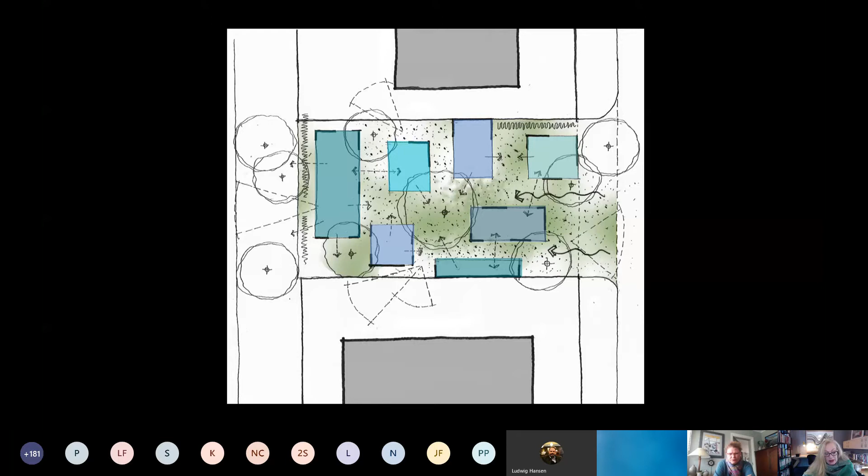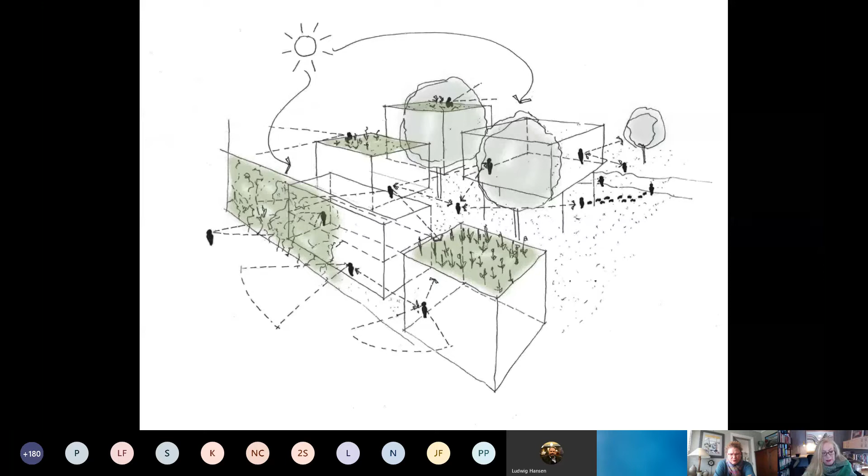The volumes have been linked through landscape, a connection to nature enhancing people's sense of well-being. The landscape also ensures that each person has direct natural light, ventilation, and access to views.

The form and scale of the building responds to its neighbours and the surrounding environs. The site is located in the formerly residential suburb of Rosebank, positioned between two major busy arterial routes and midway between Johannesburg's old city centre and the Sandton business node.

Access to the site is off Keys Avenue, home to a number of art galleries and urban artworks. It has been reinvented as the Keys Art Mile. Rosebank itself is developing into an inclusive, walkable urban centre with a distinct character.

Unlike the high walls and electric fences that often greet visitors in security-conscious Johannesburg, Law on Keys is public-facing and accessed on foot from the street.

The public areas of reception, dining, and meeting, as well as the semi-public open-plan office space, all open onto the central and northern courtyards.

Visitors pass a sculpted garden with artworks, connecting this building conceptually to the Keys Art Mile. The reception and waiting areas are connected to the central planted courtyard, a pivotal feature in navigating the building.

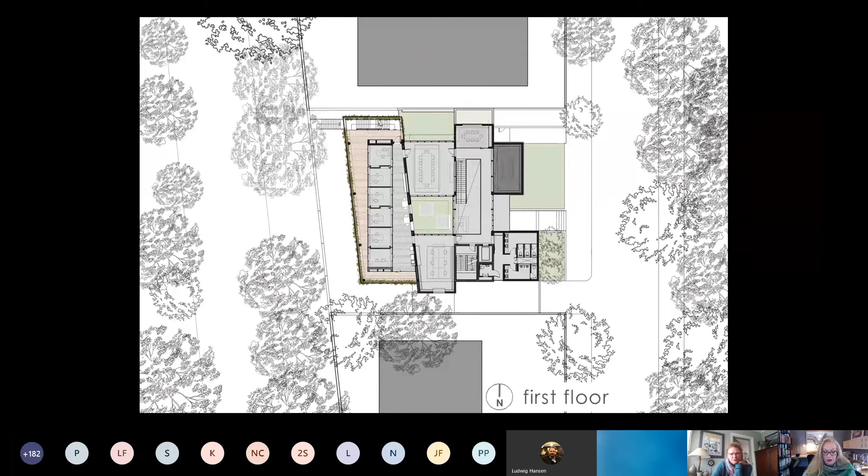The library, meeting room and boardroom at first floor level are visible from the double volume reception area below. The boardroom is accessed from the public area, but also has a private door for the legal team.

As on the ground floor, the individual offices are glass boxes opening onto a private balcony and contained within a planted green screen. Each floor has its own kitchenette and associated social space, opening directly onto a balcony.

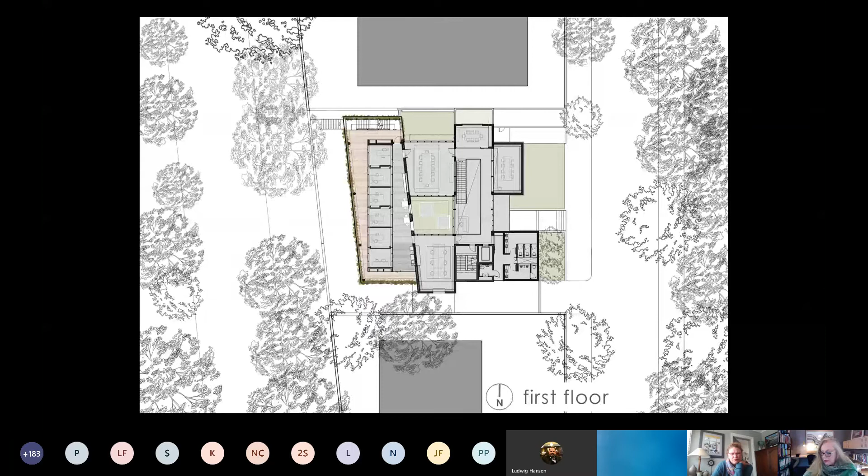Materials used for the private external balcony areas are the same internally, the private spaces seeming to float within a garden, connecting and blurring lines between inside and out.

There are no passages, instead pause spaces and comfortable waiting areas, all with far and near views of nature. The library, boardroom and meeting room are formal, quiet and unfussy, with rich detailing and materials.

The artworks and bespoke interiors, all by local South African artists and craftspeople, have been commissioned and curated specifically to suit each area.

Outdoor terraces are designed as garden rooms for entertainment, relaxation and social events, surrounded by planted roofs that offer relief and softness. Entered past the PA's office and waiting area, the senior partner's private suite opens onto a covered deck surrounded by a planted screen and planted roof terrace.

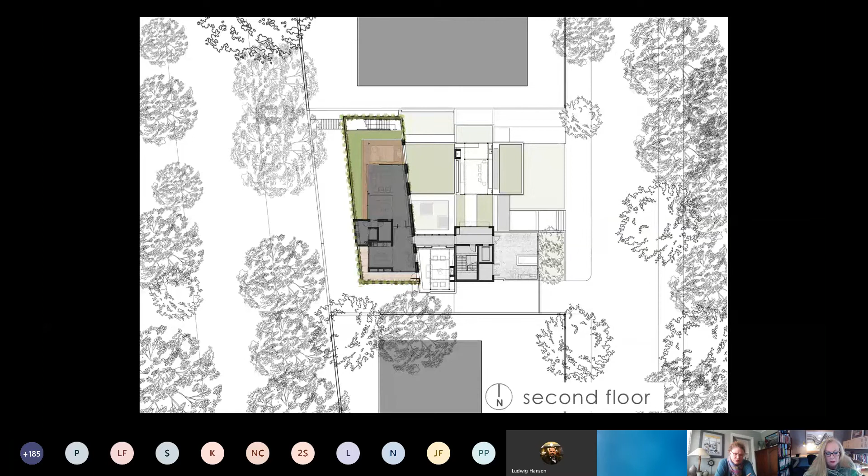The outdoor rooms, whether a typically South African barbecue area or an outdoor lounge with fireplace for winter, facilitate alternative meeting areas without adding to the bulk.

The waiting area, PA's office, and partner's suite is not only a private office, but also a meeting place for highly confidential and complex negotiations.

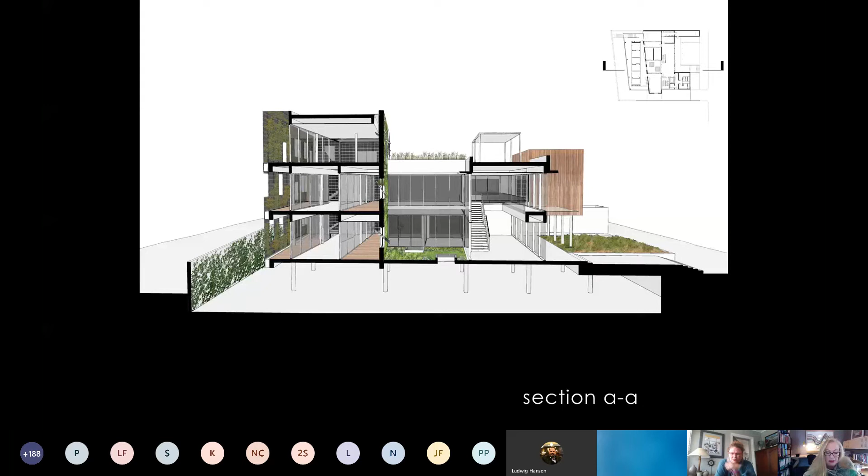This section shows how the building is integrated with the neighborhood street and simultaneously has a presence on the main arterial. Spaces are one room deep, allowing for sun penetration and natural lighting to all spaces.

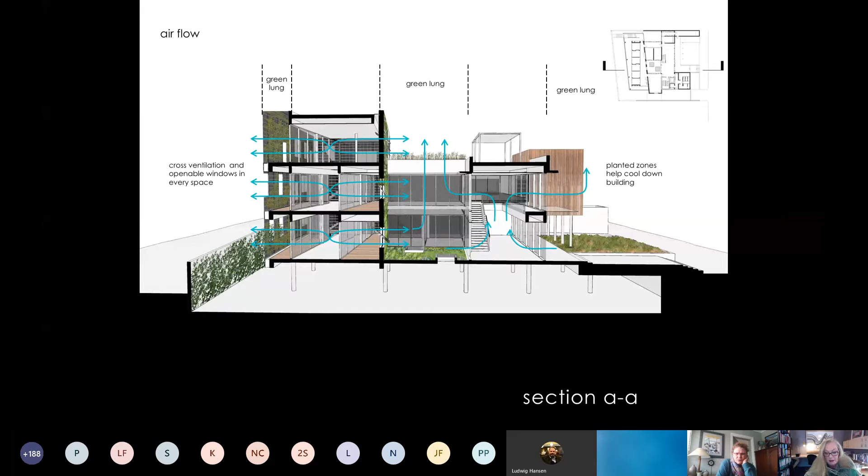Invisible to users or neighbors, photovoltaic panels on the rooftop provide 65% of the overall power requirements. Doors and windows open into the green lungs, facilitating natural and cross ventilation.

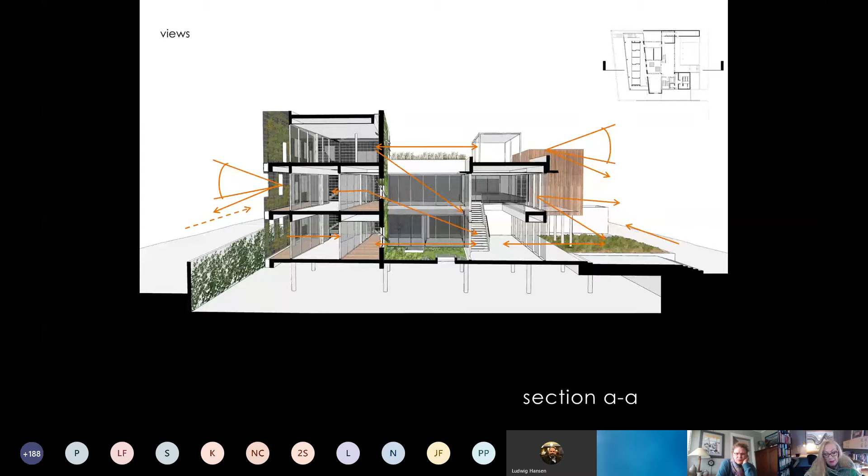Near views enable communication and visually connect colleagues. Far views connecting people with their contexts in the city beyond.

From a dry Highveld mining town, Johannesburg has been planted into a large man-made forest by its inhabitants. In reference to this man-made forest phenomenon, the idea of fabricating landscapes has been developed as a key concept.

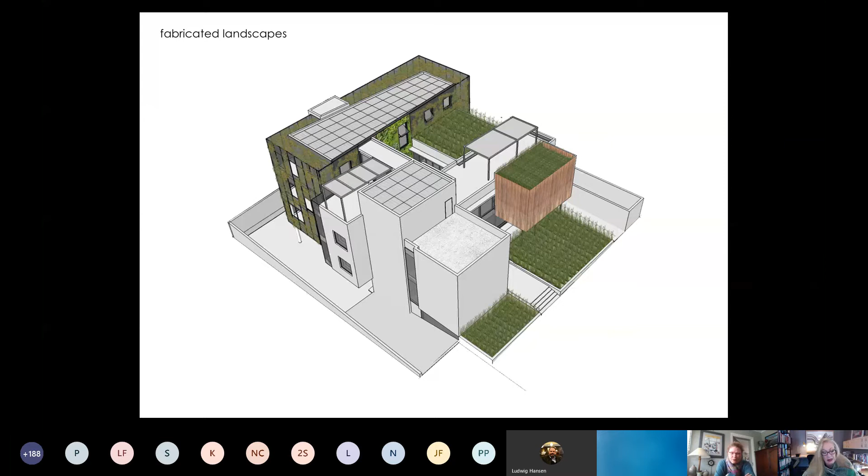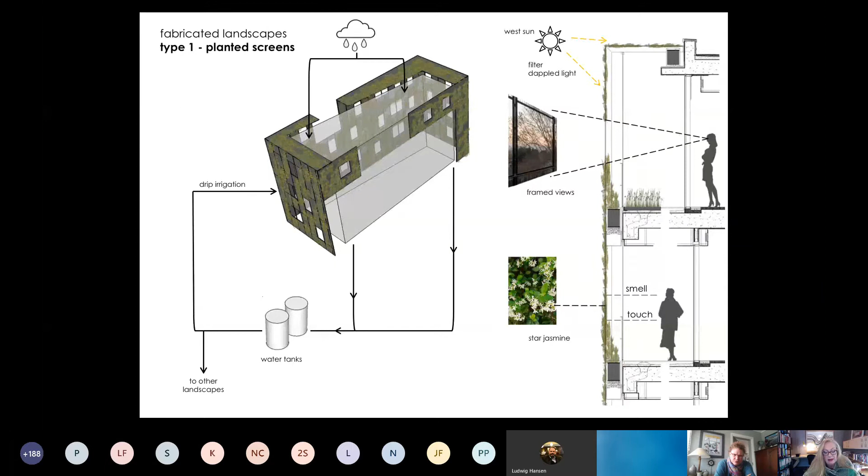There are three types. Type 1 is a 3-story planted green screen that wraps around the glass office boxes, filtering the west sun and visually screening the busy arterial road. Rainwater is collected and used to irrigate this and the other planting systems.

Cutouts in the mesh frame views of the city and of the rising and setting sun. Over time, the screen will become a sensory landscape containing the individual offices.

While the living green screen grows, the west facade is shaded by 100-year-old plane trees. Sadly, these trees will be chopped down when the road is widened as part of the urban development framework.

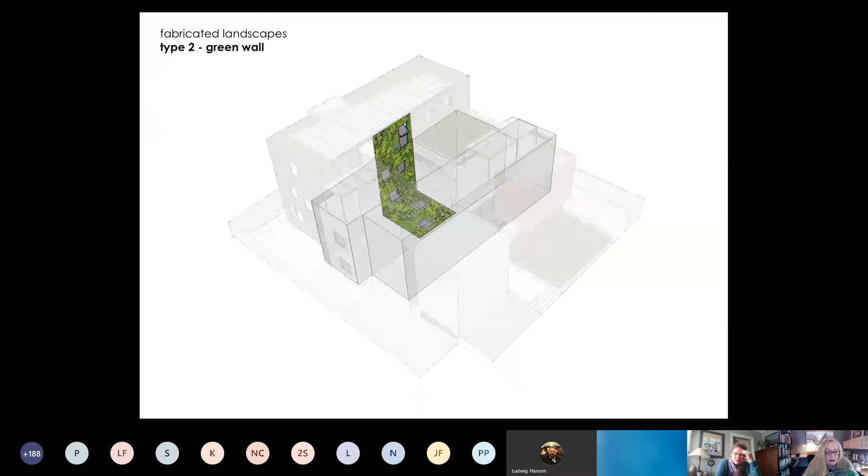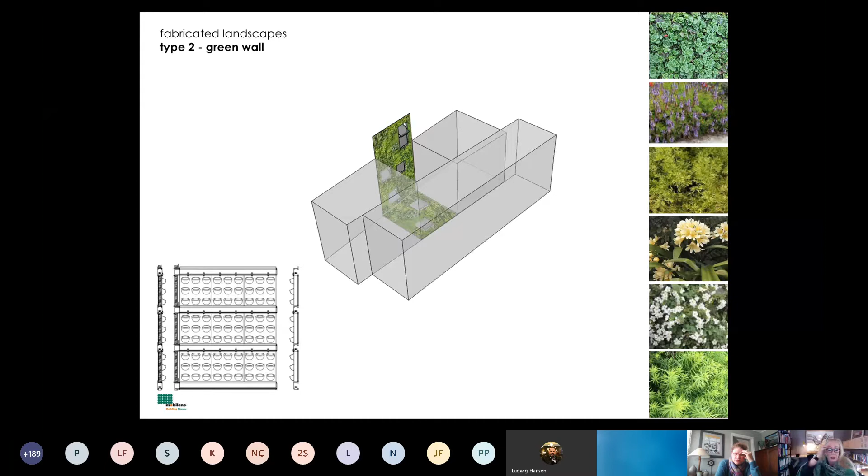Type 2 of the fabricated landscapes is a lush green carpet with seasonal splashes of orange and white flowers that cover both wall and floor of the central courtyard. Windows and skylights allow light, ventilation, and views.

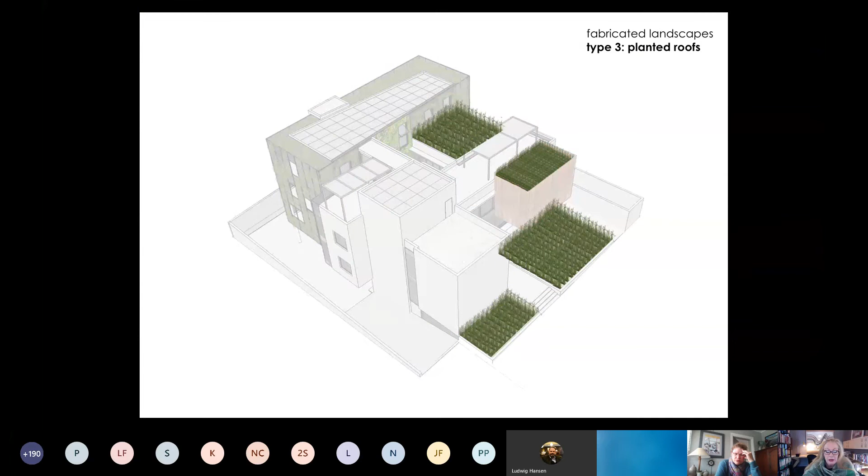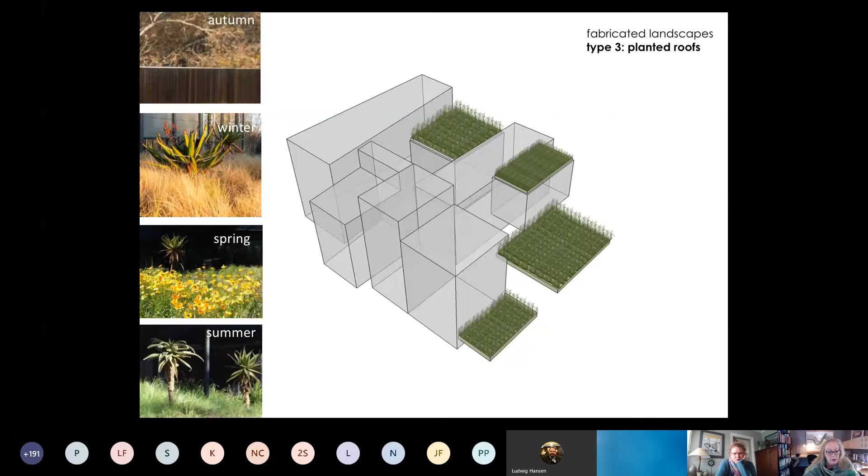This courtyard is intensely visible, hence our decision to ensure it is green all year round. Type 3 of the fabricated landscapes comprises a variety of planted roof terraces and external courtyards. They are planted with indigenous veld grasses and aloes, changing colour with the seasons, from dry yellows and reds in winter, bursting into colour in spring when the wildflowers bloom and the grasses turn green.

Summer rainfall keeps the soil moist, the resultant cool radiating via the slab to the spaces below. Winter sun heats the dry soil, thus creating warmth that is radiated downwards.

From how the building is set in its urban context, to how the visitor experiences the public spaces, and on to the intimacy of a lawyer's private office, people have been placed centre stage, thus creating what we believe is the new normal. So interestingly, that was said two years ago.

What's interesting to note is that apart from the level 5 lockdown period, this office has been fully operational during the pandemic. The library has become the new Zoom courtroom, and it is in session.

The next project I will show you is the Wits Rural Facility, which is situated near Bushbuckridge in Limpopo Province.

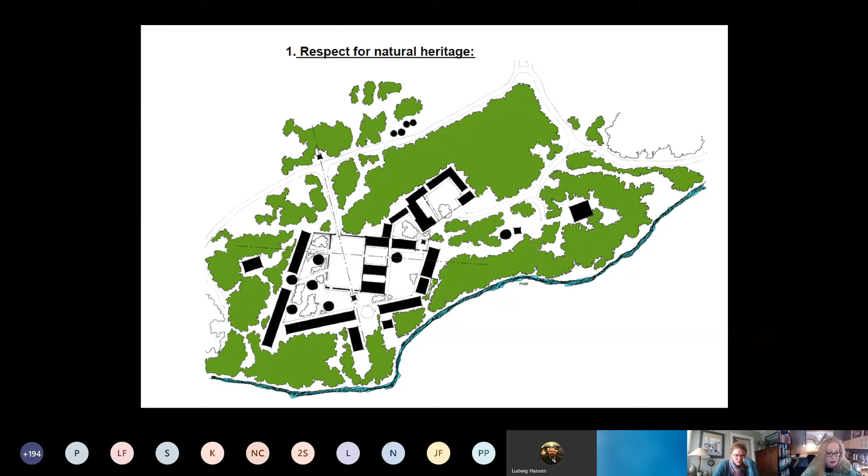Our introduction to this project was a comprehensive framework document and this drawing, amongst many others that accompanied it, all prepared by Ludwig Hansen architects and urban designers. The first of many visits to site to see the existing facilities followed, and so began our now 9-year relationship with Wits Rural Facility.

The Wits University Rural Campus is situated some 480 kilometers from the Johannesburg campus, bordering on a natural nature reserve, the Kruger National Park. This campus provides an internationally recognized alternative teaching platform for in situ research into indigenous fauna and flora, conservation, and socio-economic policy and practice for rural communities.

Researchers gain first-hand training and experience of working with rural communities. In turn, the communities become the participants in developing the various research programs, interventions, and training. Our brief was to upgrade and expand this unique offering.

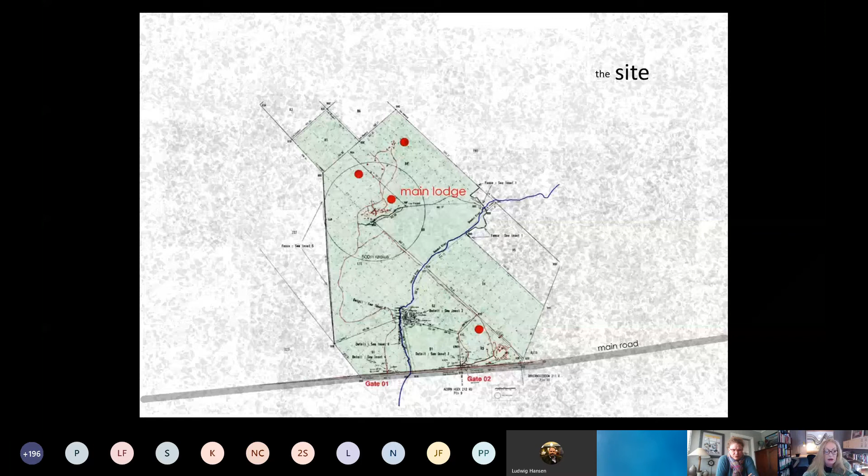In this project, the natural environment is the heritage resource, with key design considerations being to respect and regenerate this resource. To limit impact on the environment, the expanded facility was located on previously disturbed ground within the 350-hectare site.

This area was carefully surveyed and measured, and all existing significant trees positioned and identified, as well as existing buildings. Where possible, existing buildings were adapted, existing dirt roads reused, and the area pedestrianized. An architectural language and master plan were developed that enabled a phased implementation as funds permitted.

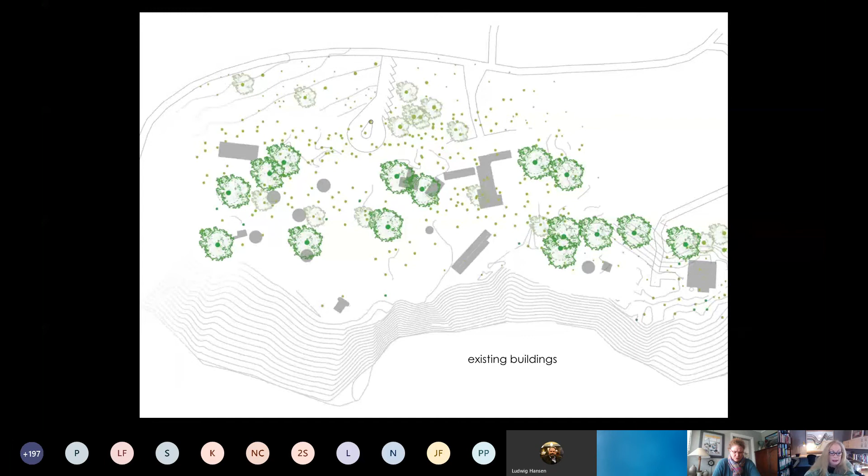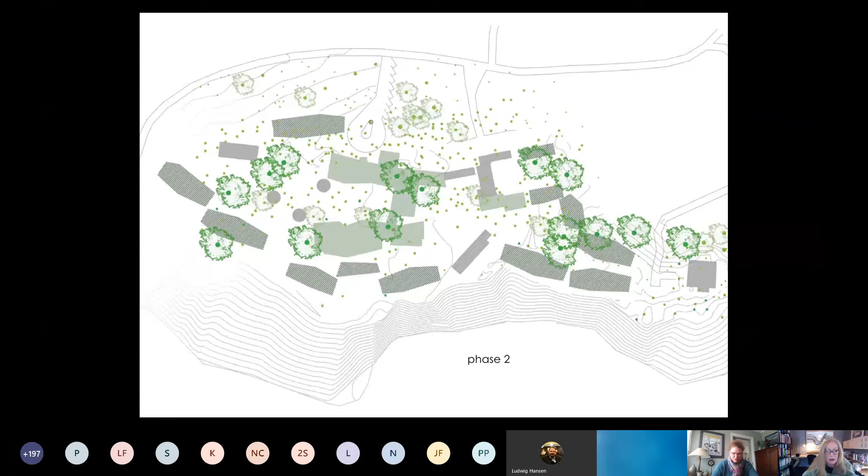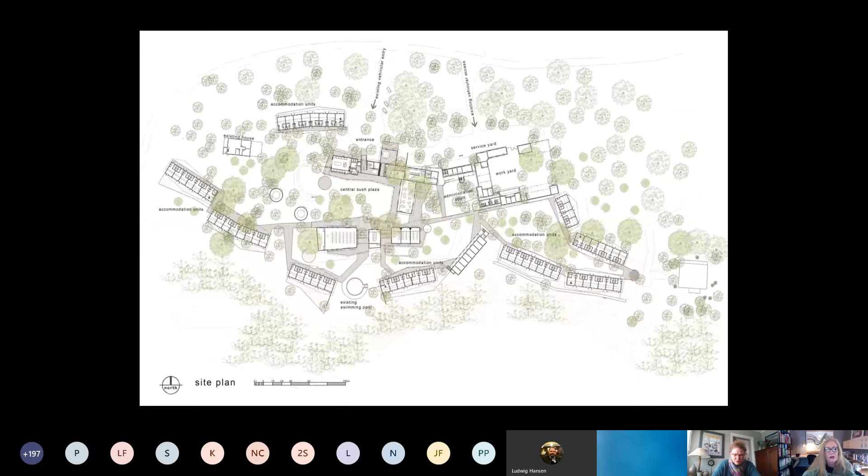Phase 1 construction being the conference, seminar, and dining facilities to support the Phase 2 construction of a 60-bed accommodation facility. So once again, Phase 1 in greater detail, and then Phase 2, again in greater detail. Then some sections and elevations.

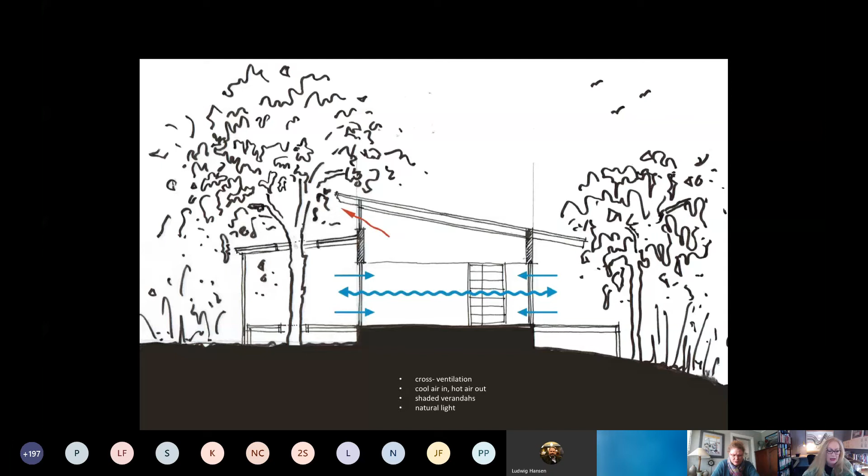The buildings were designed as singular spaces linked to covered walkways, thus allowing the various parts to shift to accommodate the terrain and protected trees. This shifting geometry creates a variety of courtyards, gathering spaces, and informal teaching spaces.

Referencing local cultural settlement patterns, prominence is given as much to the space between as to the actual built form. The roofs linking the parts respond directly to the topography of the site, rising, falling, and slipping underneath and between the existing tree cover, and even allowing for trees to grow through the buildings.

Only 2 trees, neither of them endemic to the area, were removed for construction. Visual corridors to the bushveld are opened up, the site breathes, and wildlife can wander freely between the structures and use the facilities to their full extent if so desired.

That's a water buck in the swimming pool. A traditional respect for nature is affirmed. Through a careful use of colour and scale, the buildings recede into the landscape.

The facilities are built simply, using local materials, skills and labour, so that the surrounding communities are involved in and benefit from the construction. This same ethos runs through the design and implementation of the interiors, which we were eventually also commissioned to design and install.

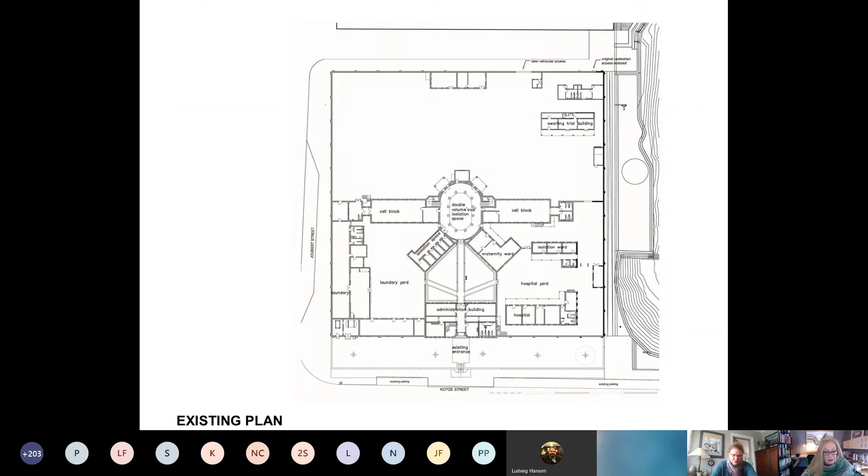Later additions to the jail were demolished to restore the significance of the original buildings and courtyards, and two new office buildings inserted to house the human rights commissions, notably the Commission on Gender Equality. History is revealed through the juxtaposing of modern elements against old. The historic buildings are activated by the new interventions.

Prisoners had to obsessively clean this central atrium, but were never allowed to walk through the center of it. Now access to the new offices is via this space, past commemorative exhibitions that describe the past and interface between public museum and private office space.

The new architectural language respects the scale and proportion of the historic fabric, but simultaneously seeks to expose and transform the prison. The new buildings, for example, quite literally jump over the existing perimeter wall, a gesture symbolizing the transformation from a place of confinement to a new expression of freedom and democracy.

Ex-prisoners speak emotively about the sky as an element over which prison authorities had no control. Sky is the image used to pattern the screens that shield the sun and mediate users' visual privacy. The rusted color of the screens references the old red brick walls.